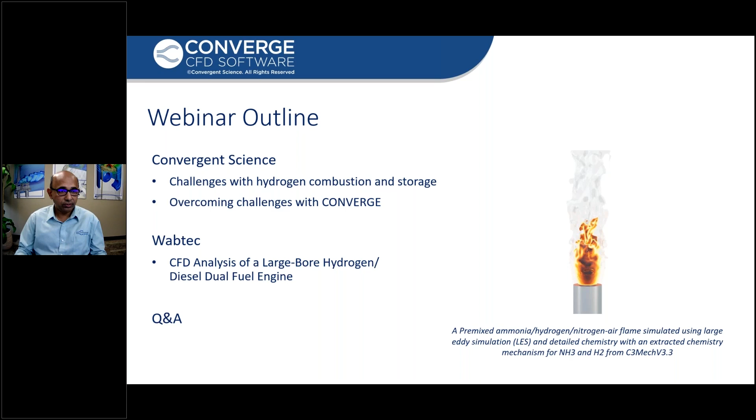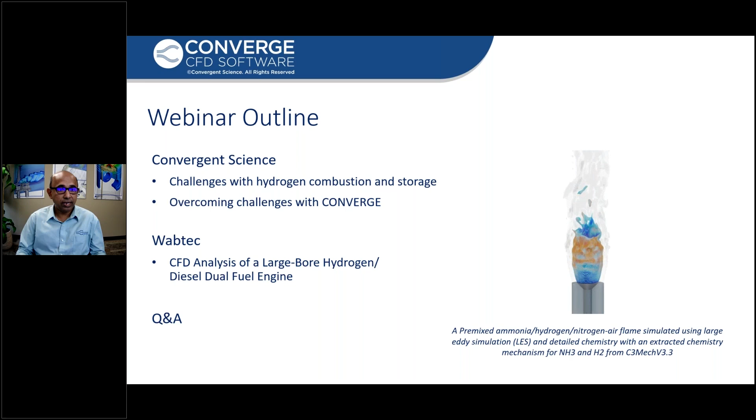Thank you, Scott. So as Scott said, my name is Sameera Wijeyakulasuriya. I'm a project manager at Convergent Science. Today, this webinar is going to be of two parts. I'm going to go first and talk about the challenges with hydrogen combustion and storage, and how with Converge you can overcome those challenges. And after me, Adam from Wabtec is going to talk about how they use Converge in their CFD analysis of a large bore hydrogen diesel dual fuel engine. After Adam's talk, we'll open up the session for questions and answers.

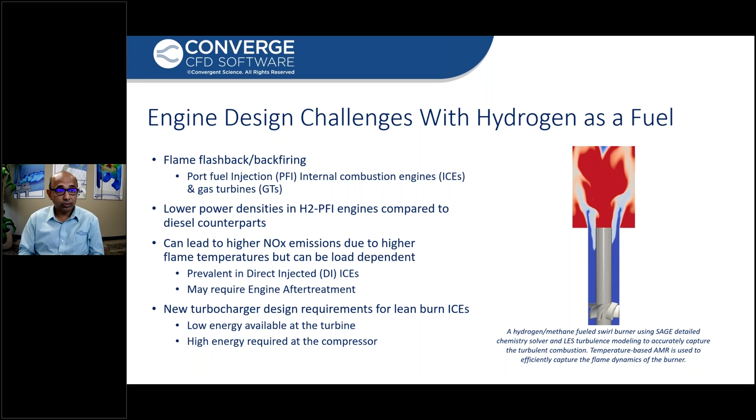So now let's first look at some of the engine design challenges with hydrogen as a fuel. One of the first things is flame flashback or backfiring. This is relevant in port fuel injection engines, where fuel comes in from the intake port and combustion in the cylinder could actually jump into the intake port, which we want to avoid. This can also be seen in gas turbine engines and burners, as you can see in the video playing. It's a hydrogen and methane fuel swirl burner, and you can see under certain conditions the flame would actually go back towards the swirler, which should be avoided.

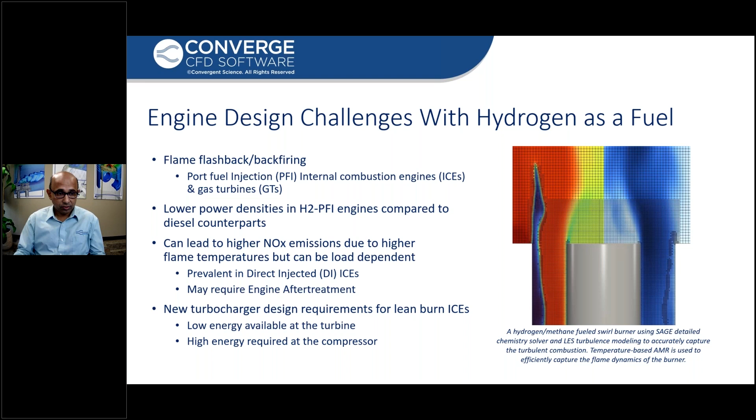Now, with hydrogen PFI engines, compared to their diesel counterparts, low power density is a challenge that engine designers need to overcome. And because hydrogen wants to burn pretty hot, that could lead to NOx emissions. This is more prevalent in DI engines, and if you have high NOx, then you would want to think about aftertreatment to reduce those emissions. Another challenge is the potential need for new turbocharger designs, specifically for lean burn ICEs, because with lean burn, your temperatures at the turbine are low, so you have low energy available at the turbine, but you need higher energy at the compressor to bring all of that hydrogen plus air into the engine. That's a challenge engine designers need to think about as well.

Now, moving on with more challenges when we use hydrogen as a fuel: reduced combustion stability and increased fire risk due to a wider flammability range. As everyone knows, hydrogen's flammability range is pretty wide, and its flame speed is quite high compared to typical fuels like gasoline and natural gas. Hydrogen also wants to transition to detonation very fast compared to other fuels. Also, its quenching distances are pretty small, which means we need to think about smaller, tighter tolerances when it comes to crevices in the engine where we don't want the flame to go in.

Another aspect is hotspots due to higher flame temperatures. This can lead to undesirable pre-knock, pre-ignition, and engine knock.

Hydrogen direct injection normally happens at very high speeds, so you'll have supersonic gas jets. You would want to design for those supersonic gas jets in your engine. Some of the micromixers in gas turbines could have really complex flow fields and significant unsteadiness that designers need to consider.

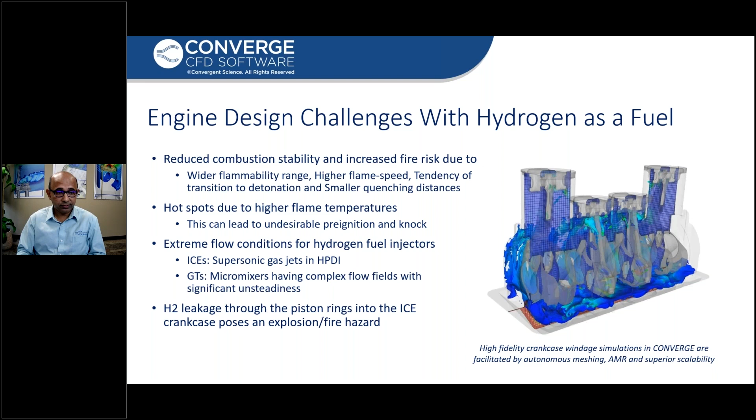Now let's look at, with all of these challenges, how Converge can help mitigate them. Let's first look at flame flashback. Flame arrestors are a device you would have in your intake port in a hydrogen engine, where fuel comes in from the intake as well.

There are certain simulation challenges associated with modeling a flame arrestor. The flame arrestor channels are extremely small. Resolving the flow and heat transfer in smaller channels can be really expensive. Flame quenching happens due to wall heat transfer, so you need to model your wall heat transfer inside these thin channels very accurately, and that can be expensive.

Then if there are multiple fuels, so if you bring in one fuel from the intake and then direct inject hydrogen or vice versa, you need to have fuel chemistry modeled from multiple fuels, and your combustion model used in CFD needs to account for that too.

Now all of these challenges can be mitigated through Converge with its autonomous meshing. You don't have to mesh at all, even though these channels are pretty small, and we can handle the mixing through turbulence modeling from LES to RANS.

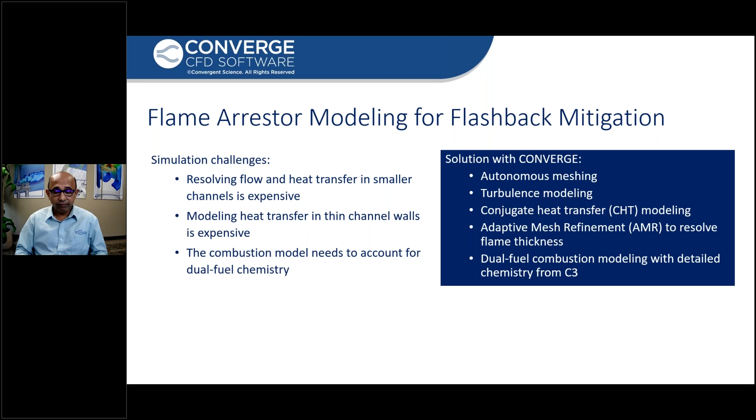Availability of dual fuel combustion mechanisms is also pretty important to have. Now I'm going to show you two videos on this slide. If you have a flame arrestor, as you can see, these 3 channels—I'm only showing 3 channels of a flame arrestor—

A flame is initiated on the right hand side and it will keep repeatedly coming back to the flame arrestor. The goal of this is to see if the flame arrestor walls would heat up when repeatedly hit with flame flashback, and if so, would the flame arrestor stop arresting the flame?

In the left hand side video, you can see the flame starts from the right hand side. It does not go to the left hand side. That means the flame arrestor is doing its job.

You can't see here very clearly because the channel thicknesses are pretty small, but there is a solid cells model, a conjugate heat transfer model. So little by little, these channel walls are getting heated up.

Now the video on the right-hand side shows that when the channels heat up and attain a high temperature of, let's say, 1200 K, you can see the flame would actually escape onto the left-hand side, which shows that if the metal is too hot, the flame arrestor will stop performing effectively.

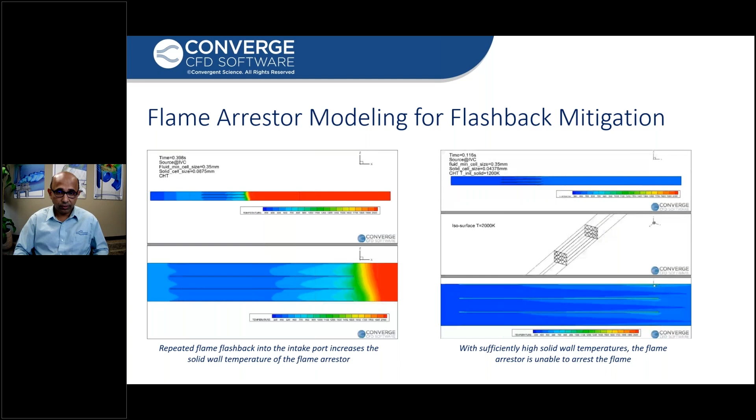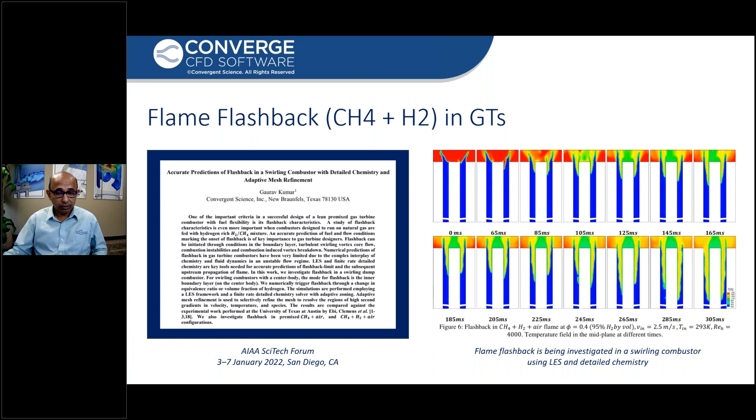Coming back to hydrogen ICEs, if you have a DI, high pressure direct injection IC engine, the gas injection velocities can be sonic or even supersonic. You need to be able to model that accurately to get the penetration right. And if you don't get the penetration right, the mixing and subsequent combustion will be off.

This kind of modeling requires finer computational cells and finer time steps, which means increased computational cost. But with Converge, you have access to all the necessary pieces to do this kind of simulation very accurately.

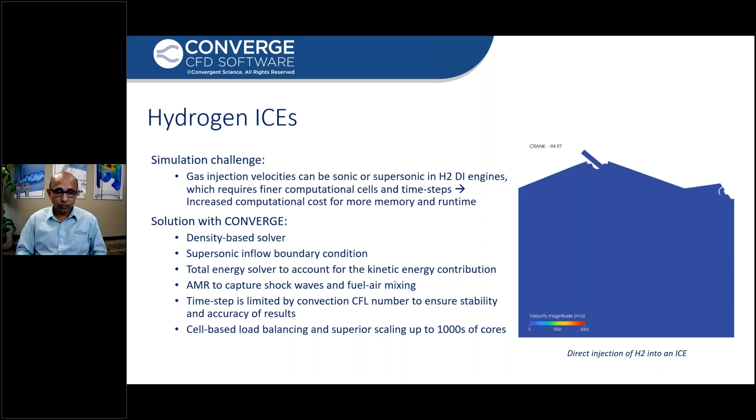We have a density-based solver which can simulate compressible flows accurately, supersonic inflow boundary conditions from a total energy solver, and time steps limited by convection CFL numbers, so you can have finer time steps. Moreover, the solver is cell-based load balanced, so even if you have 20-30 million cells, you could throw in thousands of cores and get a very good speed up.

Let's look at some work that has been done with DI engines with Converge. I'm showing two works - the paper shown on the right-hand side, published last year, is from a partnership with Ferrari. On the left-hand side, Volvo Group and KAUST from Saudi Arabia did also use Converge to model hydrogen DI engines.

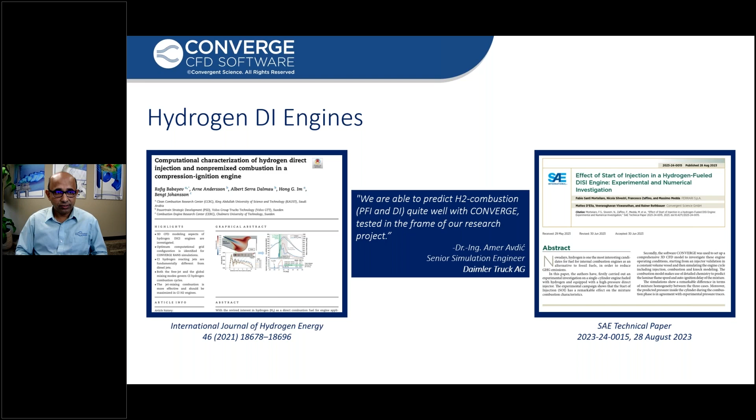The testimonial you can see in the middle is from Dr. Amer Avdić from Daimler Truck. He says, and I quote, 'We are able to predict hydrogen combustion, both PFI and DI, quite well with Converge, tested in the frame of our research project.' So you can see OEMs are using Converge for hydrogen DI engines very effectively.

This work was published last year. This is a PFI hydrogen engine where we simulated 5 operating points. I'm showing here just 3 of them - a low load, a mid load, and a high load case. Without any case-by-case tuning, with chemical mechanisms generated in-house, we are able to get really good results with PFI hydrogen.

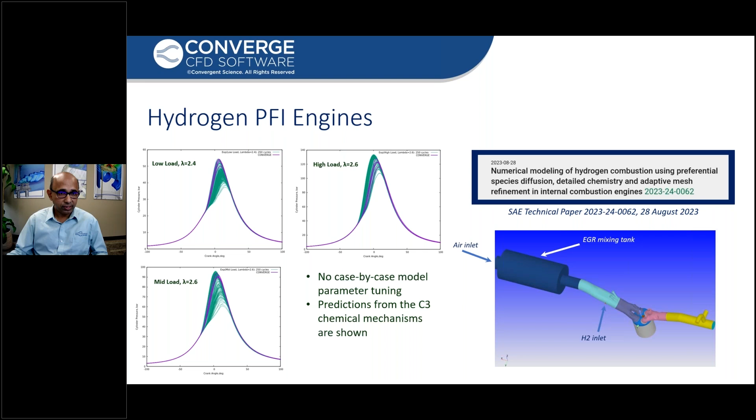So where do we get this in-house chemistry? It comes from the C3 consortium. C3 stands for Computational Chemistry Consortium.

With this capability, we can very easily generate multi-fuel chemical mechanisms. There's going to be a webinar on this in August. I invite you to attend that and learn more about the C3 consortium.

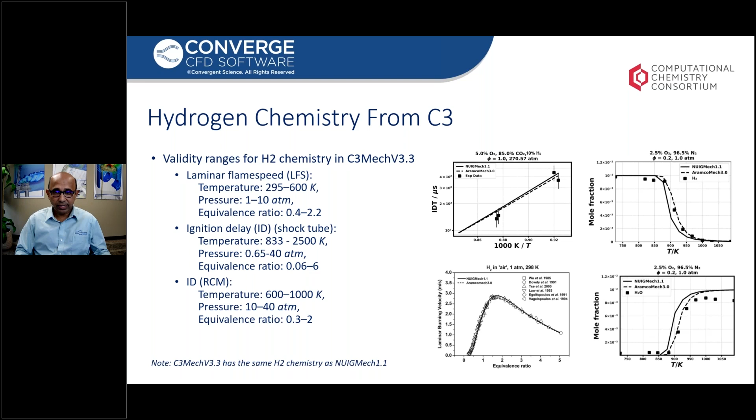For hydrogen chemistry extracted from the C3 mechanism, you can see the validity ranges, from laminar flame speed to ignition delay. There are different experiments being done, and they're all validated and published.

Now let's talk about hydrogen leakage and self-ignition. This work was done by our colleagues from our European office. They took - if you can see my cursor - this is trying to simulate if hydrogen leaks from a high pressure tank, would it actually ignite? Ignition happens due to two main phenomena in a case like this: heating due to shock waves and viscous heating near the wall.

So the simulation challenge in this is you need really fine mesh resolutions to resolve the flame thicknesses and the thickness of the hole that you have probably created in the tank.

Now the solution with Converge is with AMR. You can use it to resolve shock waves and self-ignition. You can have AMR with respect to density, pressure, temperature and velocity. You can use inlaid mesh to resolve the boundary layer inside that gap or hole that the tank has. Detailed chemistry can be used to capture self-ignition, and we can have LES turbulence modeling to resolve the flow.

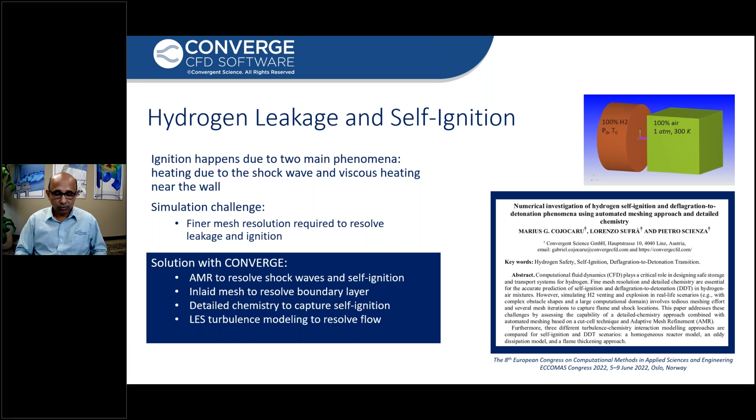One thing which is really interesting to note in this study is we saw that self-ignition happens first near the walls due to viscous heating, and then it propagated to the center of the tube. So the viscous heating came first, and you need really fine mesh resolution to capture that. With Converge, you can do studies like this.

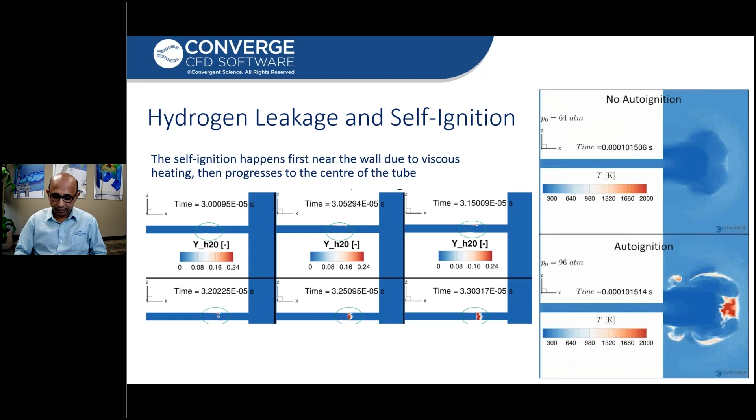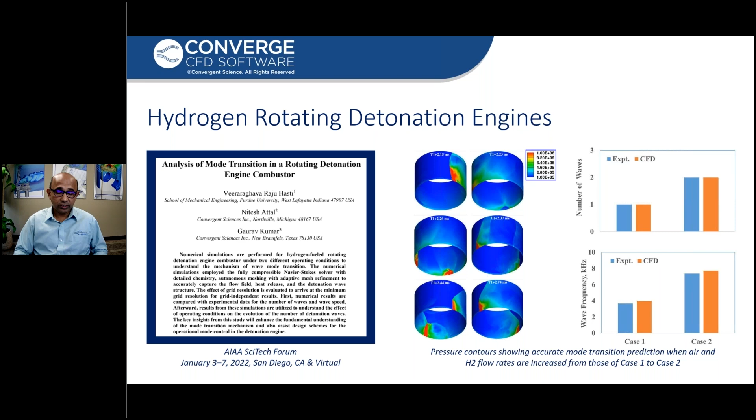People use Converge to simulate rotating detonation engines, or RDEs, with hydrogen. This work is by Purdue University, where they used Converge to simulate different operating points. There are two cases corresponding to different mass flow rates, and at one mass flow rate you have one detonation wave, while in the other you have two detonation waves. We were able to capture those physics very accurately with Converge.

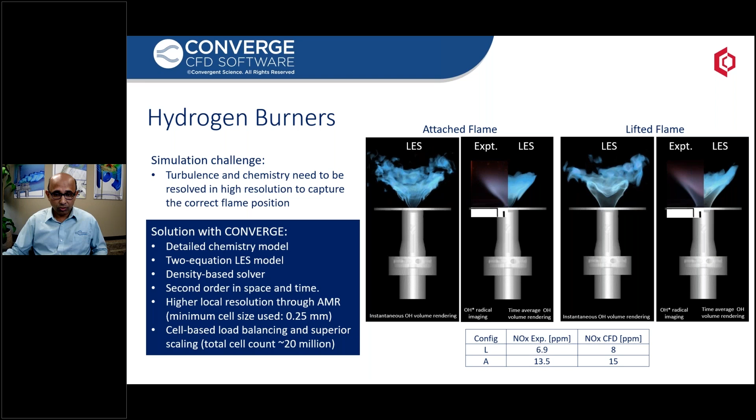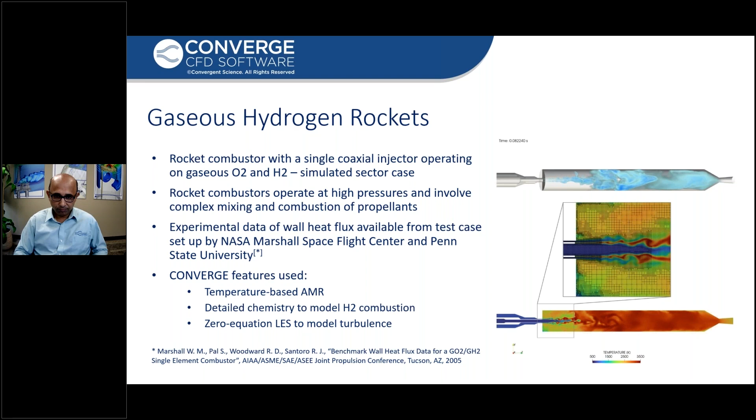This slide talks about how Converge can be used to model hydrogen rockets, gaseous hydrogen rockets. This study specifically uses experimental data from NASA Marshall Space Flight Center, and with Converge capabilities like temperature-based AMR, detailed chemistry, and LES, you can do very accurate rocket engine simulations.

To summarize, at the start of my presentation we talked about some challenges with hydrogen as a fuel. Everyone wants to use hydrogen as a fuel, but there are certain challenges, like high computational cost due to properties like a wider flammability range. It has higher flame speeds, it wants to transition to detonation and burn really fast, and it has small quenching distances. That means the gap sizes you don't want the flame to pass through need to be much smaller.

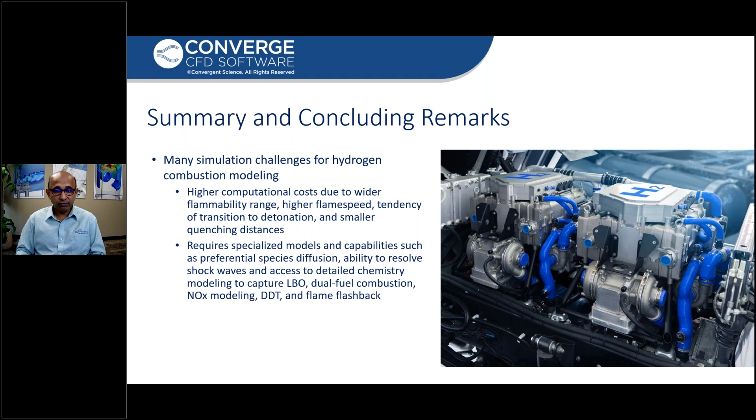It requires specialized models and capabilities in your CFD code, like preferential species diffusion, meaning you need to account for binary molecular diffusion. Your code should be able to capture and resolve shock waves, and the detailed chemistry solver needs to capture things like lean blow-off in gas turbines, dual fuel combustion, emissions modeling, deflagration, detonation transition, and flame flashback. These are really complex physical phenomena, and the code you use should be able to handle them to model these physics problems accurately.

In the second part of my talk, I showed examples and publications on how Converge can be used to mitigate some of these issues. One is autonomous meshing, so you do not have to mesh at all with Converge. That takes out the bottleneck of really tiny channels or complex geometry, where autonomous meshing comes in really handy. Adaptive mesh refinement can be used to automatically resolve the important flow and combustion features, and the combustion solver and CFD solver parallelize really well.

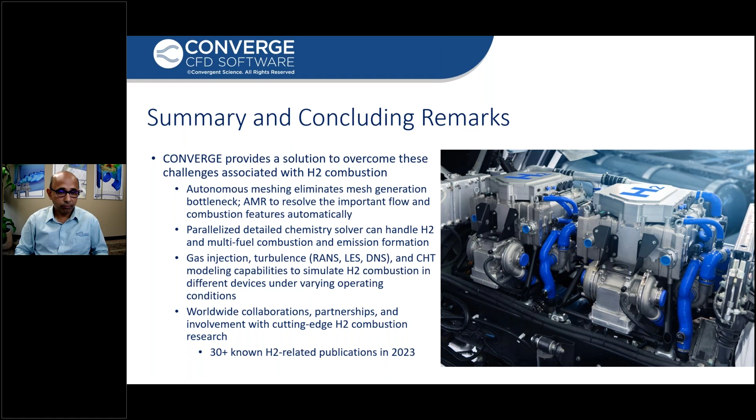Finally, I want to point out that we have worldwide collaborations, partnerships, and involvement with cutting-edge hydrogen combustion research. Just this past year, 2023, we had more than 30 known publications for hydrogen combustion with Converge, which shows how much work we and our partners have been doing. That's the end of my talk. Now, Adam Klingbeil from Wabtec will take over and talk about his part of the webinar. Over to you, Adam.

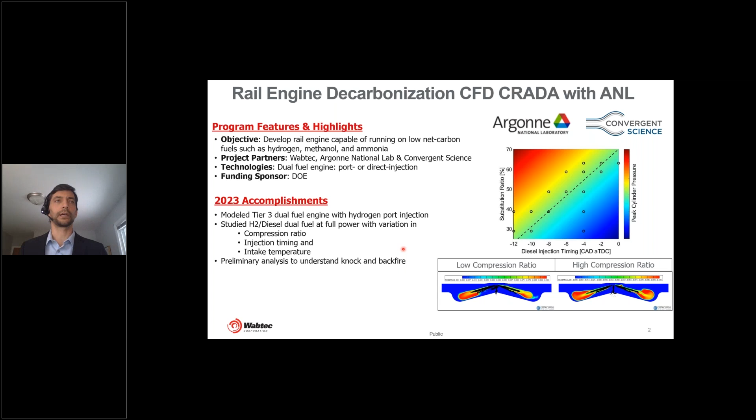For those of you less familiar with the locomotive industry in general and some of the challenges associated with locomotives, there's a few details I wanted to call out just to set the stage about how things are a little bit different with locomotives compared to on-road.

Locomotives operate in some pretty severe environments. They experience pretty high shock loads. When trains are coupling, you've got essentially a 400,000-pound vehicle driving into a stationary 400,000-pound or more vehicle, and when they smash into each other, that's basically the train coupling together. So that can be a pretty shocking environment, and it creates challenges for some of the hardware that's put on the locomotive.

Another challenging condition for locomotives is tunnel operation. Some of the tunnels that go through the mountains in North America are unventilated, and the consists of trains and cars that go through those tunnels can build up a hot exhaust inside the tunnel. So when the first locomotive in the consist goes through, it experiences relatively fresh air, but it's dumping all of its exhaust and waste heat into whatever remains inside that tunnel. When the second locomotive in that consist comes through behind it, it's now ingesting exhaust and waste heat from the first one. So it can very quickly run into challenges with low oxygen levels and difficulties rejecting heat. That's another challenging condition locomotives experience, and we need to understand how to deal with it.

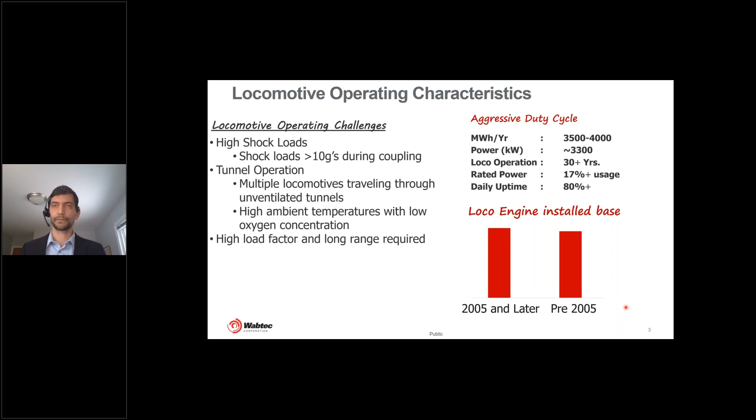The work I'm presenting here is based on our NextFuel dual fuel platform, which is a dual fuel retrofit kit for our Tier 3 locomotive engines. These are typically diesel electric locomotives, and we've developed a natural gas diesel dual fuel retrofit kit called NextFuel that we can retrofit into those locomotives. We've got some of those in service in North America. The work I'll be presenting is based on that same design, but instead of natural gas, we'll be using hydrogen as the gaseous fuel, and we assume diesel fuel is the liquid fuel.

Just a few details about the engine: it is 375 horsepower per cylinder. The cylinder is a 250 millimeter bore and 320 millimeter stroke, which gives us 15.7 liters per cylinder displacement.

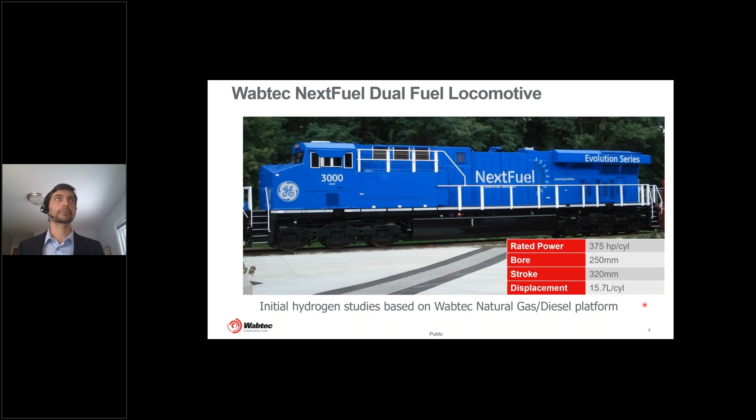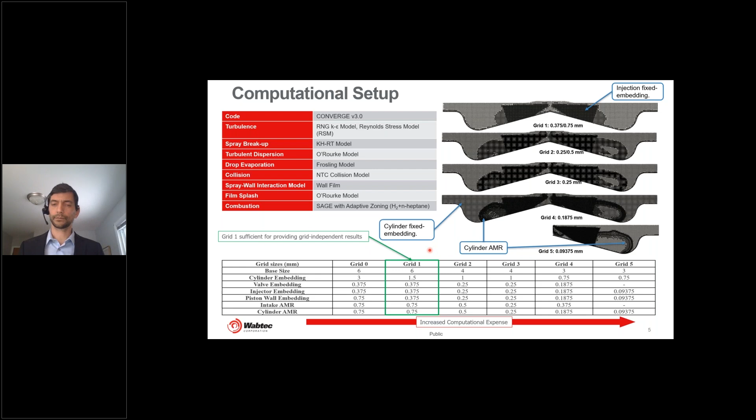What we're trying to understand is if we change, for example, the manifold temperature or the compression ratio, how does it impact the combustion? How does it impact things like fast combustion or knock? And how does it impact efficiency and emissions?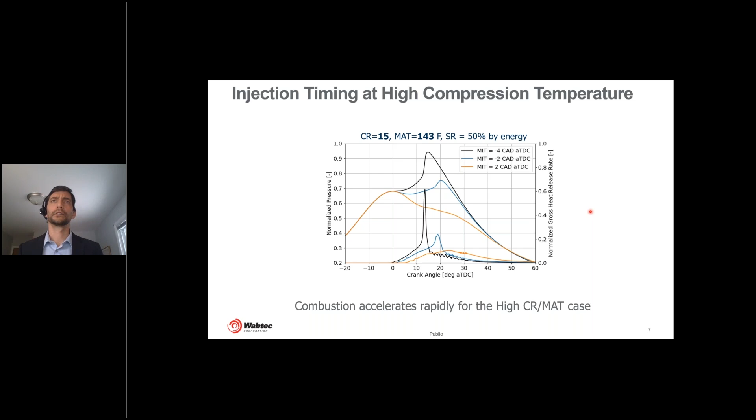So enough talking about one-dimensional data. I'd like to show a little bit of some CFD results. I think everybody likes to see these types of pictures. So what I'm looking at here is basically...

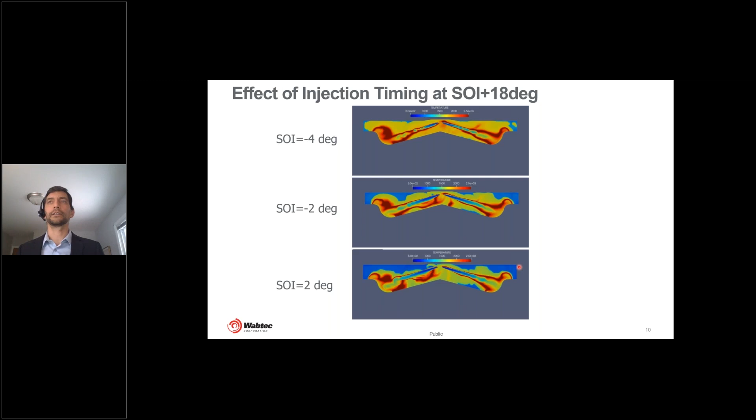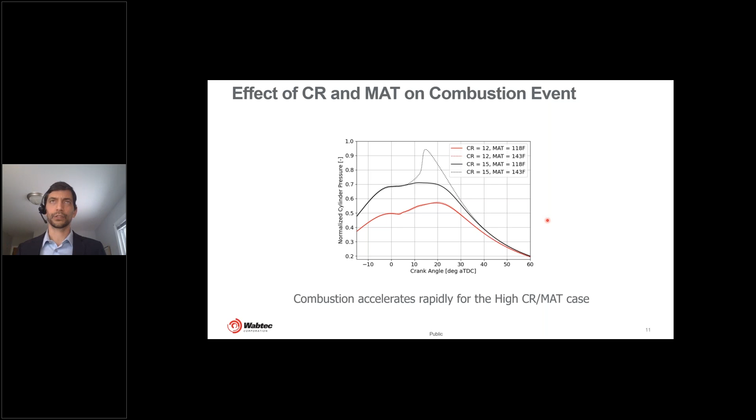The high compression ratio, high manifold temperature case, the dashed black line, has the highest compressed gas temperature before and during combustion. What we see from all of this is 3 of the 4 cases show relatively controlled combustion. The 4th one, the high compressed temperature case, very rapidly increases in cylinder pressure because the combustion event is accelerating quickly.

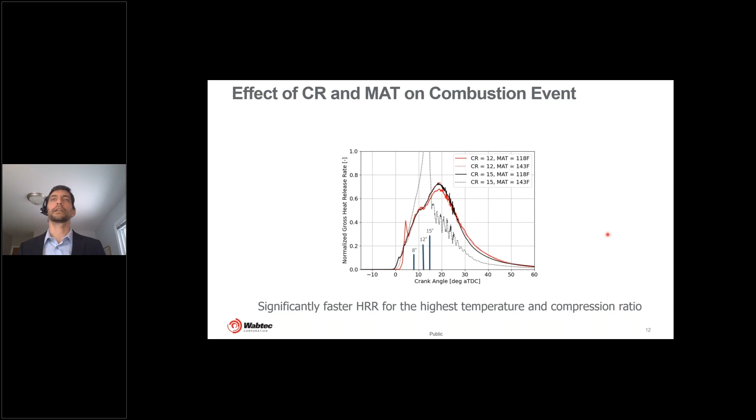So I'm showing here the heat release rate for those same 4 conditions. Again, for 3 of the 4 conditions where the cylinder pressure was under control, we also see the heat release rate is relatively smooth and I would say diesel-like, even though this is a dual fuel operating condition. But for the 4th case in black, we see that heat release take off very quickly and shoot up very high, likely because it's consuming all of that hydrogen very quickly. I've got some snapshots here at these points in time, which I'll show in the next 3 slides, and we can see how that fuel is consumed as we go through time.

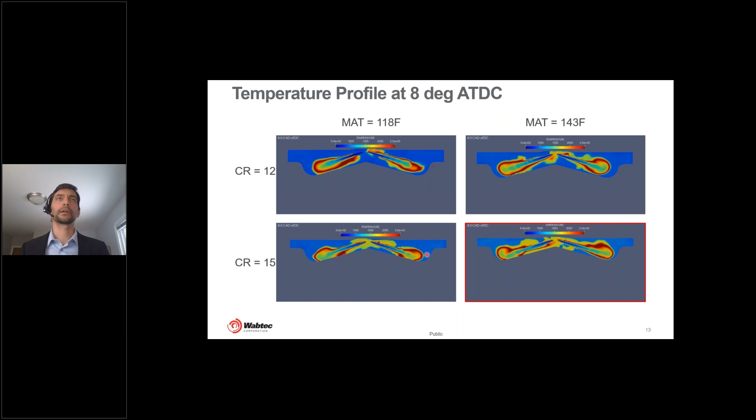So these types of conditions will be things that we want to explore in testing, but we probably want to avoid in practical operation, because we would have concerns about how that impacts the reliability of the engine in the long term.

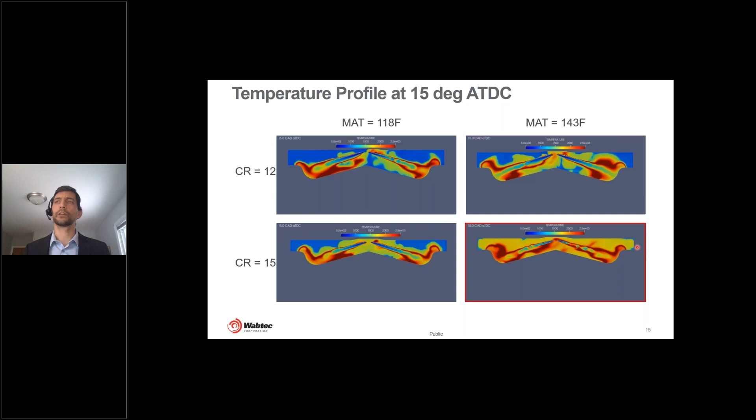I wanted to talk about one other topic that we've been exploring in CFD, and that's backfire evaluation. One concern that we have with hydrogen dual fuel when we're injecting the hydrogen gas into the intake port is the concern about having backfire, where when the intake valve opens and the hydrogen and air begin to get ingested into the cylinder, if that hydrogen touches some hot exhaust gas or touches a hot surface, could it ignite and then feed back into the intake manifold and have all that fuel burn in the intake manifold, potentially in a catastrophic way? So we started looking at this on this project as well. I'll show you a little bit of information that we've got so far, but this is a work in progress, so we've only just begun on this particular topic.

The way this was modeled is we ran a CFD evaluation of the intake runner and the cylinder, that whole entire volume, with combustion turned on throughout the cycle, so that we could see if we get combustion not only in the cylinder, but also in the intake manifold. This is a pretty expensive simulation because you have to run it 720 degrees, but not only that, we ran it multiple cycles to set up a steady state condition, and then you have to run it with the combustion chemistry turned on for the entire cycle, not just during the closed portion of the cycle, which is a common method of running the combustion CFD.

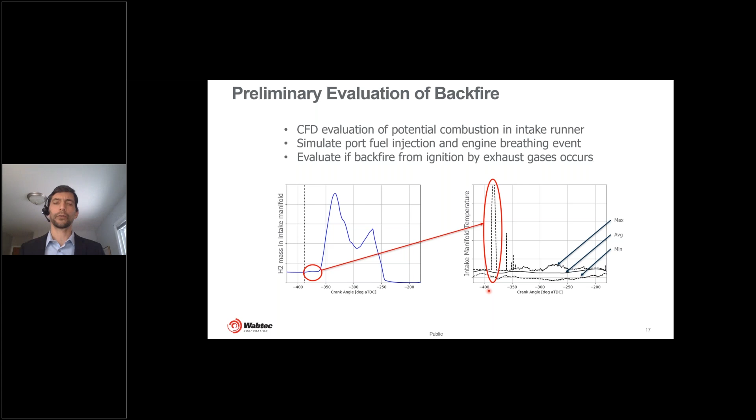So future work that we have planned, refining that backfire analysis and going into more depth, that's one thing we want to be exploring. Comparing results to experimental data - right now we don't really have experimental data for this engine, but we'll get it later this year. Once we do, then we'll do some comparisons to be able to validate our CFD and potentially identify any errors with the CFD that we need to refine our models.

And then we'll also be evaluating direct injection concepts as well. Everything presented here was port injection for the hydrogen. But in the future, we'll also be exploring direct injection for the hydrogen fuel.